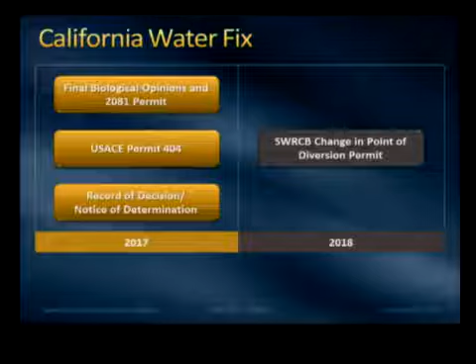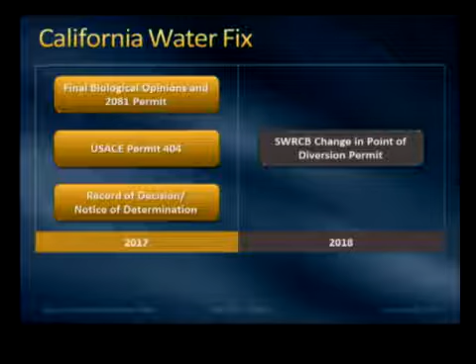And your team also mentioned in the presentation that the cost sharing agreements would follow. So are you thinking of bringing that to the board around April? Or maybe later? We've always wanted to bring the cost allocation at the same time that we have the permits, and it looks like it's on track to do that. So I think that's coming along, particularly on the State Water Project side. The federal side seems it's lagging just a little bit, but that's our plan, is to bring it in its entirety, because you've got to see the whole package. Any other questions of Randall?

Thank you, Randall. Next item is project implementation considerations for California WaterFix. John Bednarski. Yep. Welcome. Yeah, thank you, Mr. Chairman and members of the committee. I will be presenting really a kind of a two-part presentation, this is the first of two presentations, January and February, which will give a little bit deeper dive on some of the implementation aspects of the California WaterFix. So today I'll be covering initially an overview of the California WaterFix facilities, and then talking about our review of other mega tunnel projects that have been completed or in the latter stages of completion, comparators to the California WaterFix tunnels.

In February, we'll be covering risk management on the program, not only construction risk management, but also design risk management, and then also be reviewing the cost estimates that have been prepared for the California WaterFix. We've had 2 separate cost estimates prepared. They're within 7% of each other, but you'll get a deeper dive on that in February.

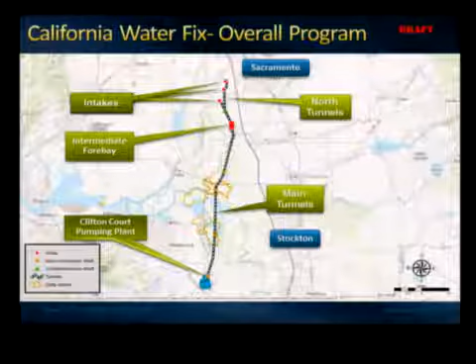So California WaterFix overall program stretches as the crow flies about 38 miles from the intakes on the Sacramento River down to Clifton Court. Along the way, we have 3 river intakes, each at 3,000 CFS. The water from those intakes is collected into what we refer to as the north tunnels. That water then flows to the intermediate forebay, where the water is commingled together. The hydraulic grade for the twin tunnels is set at that point, and the water flows then through the main tunnels down to the Clifton Court pumping plant, where the water is lifted into Clifton Court and then can be distributed to either the Jones or the Banks pumping plant south of Clifton Court.

On the tunneling portions of the program, the north tunnels comprise approximately 9 miles of tunnels. Fairly large tunnels up here because we have a completely gravity-fed system now with the revisions that we made during the EIR-EIS process. So those tunnels up there range from 28 feet in diameter to 40 feet in diameter.

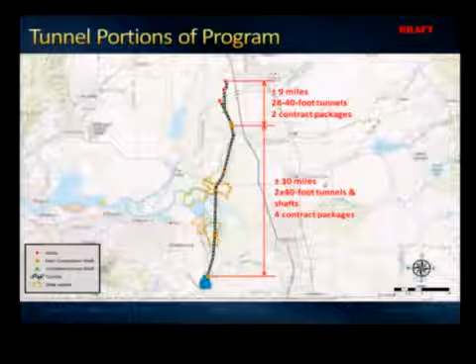They convey the water from the intakes to the intermediate forebay. At that point, the water is split into the twin tunnels, 40-foot inside diameter twin tunnels, which carry the water 30 miles to the south to the Clifton Court pumping facilities. Total of 69 miles of tunnel with this program. The main tunnels will focus on those.

They're going to be designed with a 100-year lifespan. Primarily what that means is that the tunnel segment design will be very robust, along with the gasketed liner. This will be our primary liner for the system. There will be no steel liner inside here, so we'll be relying entirely on the segmental liner design and the gaskets to prevent either infiltration into the tunnels or exfiltration leakage out of the tunnels during operation.

We've conducted a number of studies based on a revised hydraulic profile. We're very confident that these tunnels will operate very well with minimal leakage either in or out of the tunnels. The tunnels will be about 150 feet below grade, and the importance of that is that water pressure at the bottom of the tunnels will be about 65 psi, and because we're not in rock tunnels, we're in what is considered soft ground, fully saturated ground.

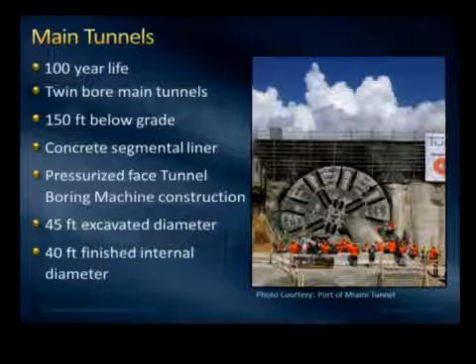Once you open up that ground with the tunnel boring machine, if you do not have what we call a pressurized face tunnel boring machine, that ground will tend to run into the machine in an uncontrolled manner. So the type of tunneling technology that we're looking at will be pressurized face; either an earth pressure balance machine or a slurry machine will be employed by the tunnel contractors. Excavated diameter is 45 feet. Tunnel segments are a little bit more than 2 feet thick. The inside diameter of the twin tunnels is 40 feet.

Many people ask us the question about, these are very large tunnels. How do they fit in with the state-of-the-art of tunneling technologies? We feel that we are situated squarely in the middle of large tunnel boring machines. We don't feel that we're at the bleeding edge of technologies. We're letting others set the pace there.

3 tunnels I want to point out that are the largest in the world. The Sparvo tunnel in Italy, a road transportation tunnel, was the largest until that was surpassed by the Seattle tunnel about 5 years ago with that design. Just want to point out at the time that design was about 30% larger than the Sparvo design. So this was a large increase in the size of the design. Many people have heard about the Seattle tunnel. I'll touch on that later in the presentation.

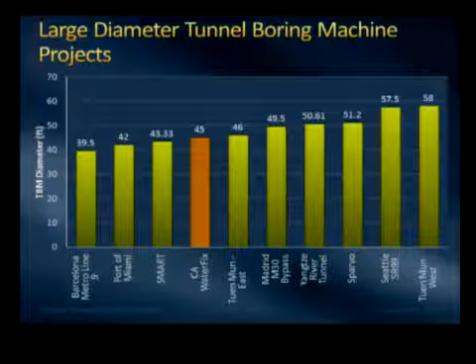But since that time, the Seattle tunnel has even been outstripped by a larger tunnel in Hong Kong, 58 feet in diameter. So as you can see, larger and larger tunnels are being built now. But again, we feel that we are comfortably in the middle of the large tunnel boring machine technology.

Some of the program facts: over 700,000 tunnel segments will be used. This translates to about 80,000 segmental rings that will be constructed in the program. 23 million cubic yards of material will be excavated from the tunnels. This has all been accounted for in the EIR-EIS. This material will be stockpiled near the tunneling sites on the islands as we move south through the delta. 10 to 12 tunnel boring machines will be in operation at some point simultaneously during the program.

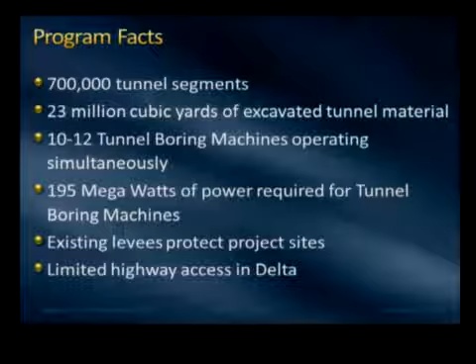And then to point out, almost 200 megawatts of power will need to be brought into each of the launching shafts for these machines. We do have large high voltage transmission lines that go through the delta, but these are to transport power up and down the state. So we are working very closely now with a number of different power providers in the delta to ensure that we can bring in the required amounts of power to run these machines. This is a long lead time item, so some of this work has already been started by DWR in advance.

Just to give you an overview of the river intakes, we have 3 of these at 3,000 CFS each, ranging in length, depending on the morphology of the river at the different locations, from 1,250 feet long to over 1,600 feet long.

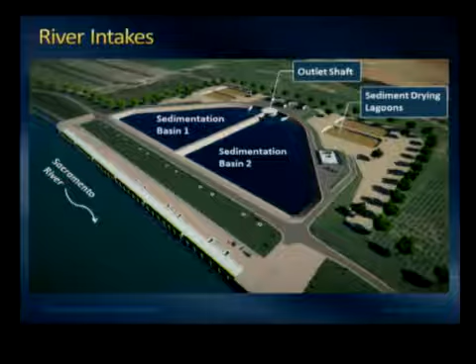At that point, you can see an outlet shaft. At that point, the water will drop into the tunnel system and then be carried south to Clifton Court from that location. At the terminus of the tunnels, we are planning to provide 2 large pumping stations, each one at the terminus of a tunnel. So we have 2 of those, 4,500 CFS each. Vertical turbine pumps will lift the water about 15 to 20 feet out of the bottom of the tunnels and deposit that into Clifton Court, where it will then flow by gravity to both the Jones and the Banks pumping facilities.

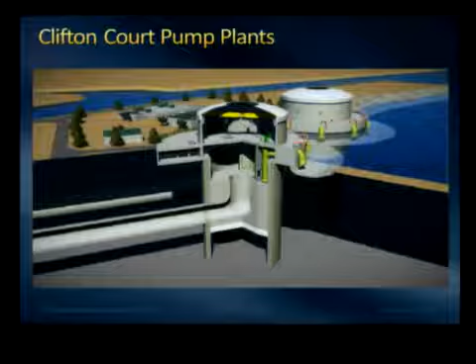Schedule for the program. Once the program is authorized to move forward, we're anticipating a 16-year implementation time frame. About 12 to 15 months early on, we'll be staffing that organization chart that I showed. That'll be hiring the in-house staff that will man a number of the key positions, as well as hiring the consultants that will be performing a number of the key work activities. There's about 4 years of land acquisition work that will take place early on in the program. We've learned from other projects that it's really important to make sure that you have all of your property acquired before you begin construction and start awarding construction contracts.

And then about 4 years after the commencement of the project, we'll actually begin work on awarding tunnel construction contracts. So tunneling will not start right away. I just want to make sure everybody understands that. And once the contracts are awarded, tunneling will still not start right away, because we anticipate that the contractors will be responsible for sinking those large shafts that will serve as the launching points for the tunneling activity.

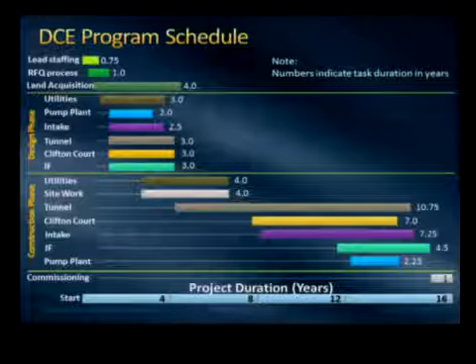So again, a 16-year overall implementation schedule. The construction of the tunnels goes for about 11 years. We're anticipating that 10 to 12 tunnel boring machines will be operating simultaneously during periods of that program, especially in those key years 7, 8, and 9. A lot of tunneling activity taking place.

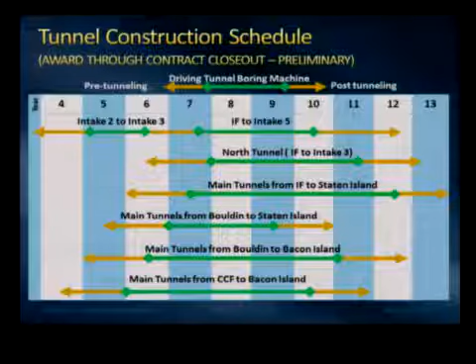Again, 10 to 12 machines working. It's a large number of tunnel boring machines to be operating simultaneously, but it's not unprecedented. In Mumbai, India, they have up to 17 TBMs working on their metro system simultaneously. In Doha, Qatar, 21 TBMs. And then closer to home in Mexico City, they have up to 8 TBMs working on a sewage collection system there too. So again, we feel strongly that the management of the tunneling activities is within the state of the industry practice these days.

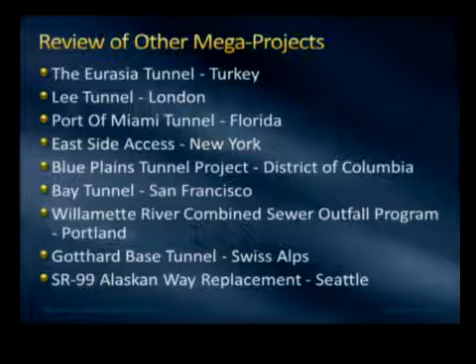So now what I'd like to do is shift gears and give you a review of some of the other mega tunneling projects in the world. We have a selected list. Many of these are what we call soft ground or mixed ground tunneling experiences that have been completed. We've got the Seattle Tunnel at the end of the list because we get so many questions about that project. We did want to definitely hit on that. And we have one hard rock ground. It's called the Gotthard Base Tunnel. You'll see why we bring this one into play for discussion also, but we did want to give a review of some of the larger tunnel projects that have taken place throughout the world.

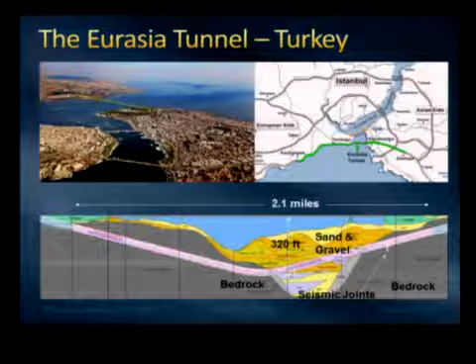So we'll start with the Eurasia Tunnel Project. This is a tunnel that crosses underneath the Bosphorus Strait, historically the divider between Europe and Asia. This project recently won the International Tunnel Association Project of the Year in 2015. It's a 45-foot OD. There's a typo in here. It's actually 40-foot inside diameter. So again, very similar to our size tunnel project. It was a design, build, operate, transfer project. So a unique delivery mechanism where the contractor designed it, built it, is operating the tunnel, and in the future will transfer that tunnel back to the owner. The project was completed ahead of schedule and within budget.

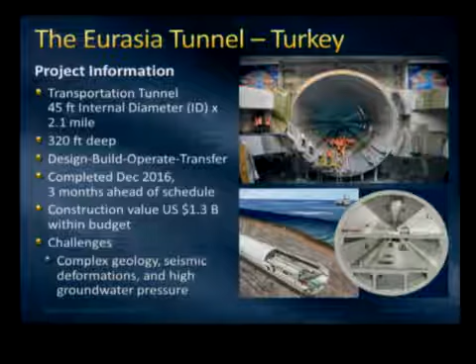Some of the key challenges were you're passing about 300 feet under the Bosphorus Strait, so water pressure at that point was about 165 psi. So quite a bit more than we have encountered with ours. They crossed an earthquake fault, so they had to install a seismic joint inside the tunnel. All of this was installed without a hitch. The tunnel went into operation last year.

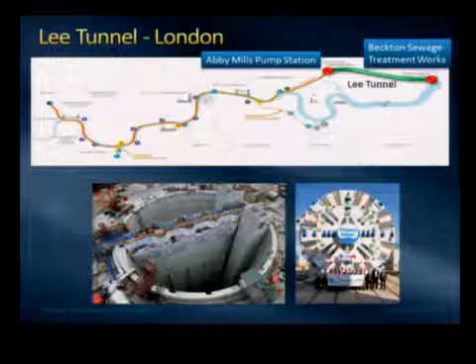The Lee Tunnel is part of a multi-tunnel effort, part of the Thames Tideway project in London. It is a CSO project, by that I mean a combined sewer outfall project, a series of tunnels linked together to capture surface runoff before it goes into the Thames River. The tunnels act as a collection and storage system, whereby as the rains subside, the water can be pumped out into a wastewater treatment plant and then deposited back into the Thames River as clean water. The project that has been recently completed there is the Lee Tunnel.

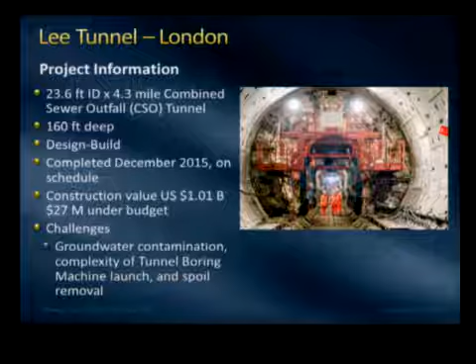A complex project, about 24 feet in diameter. This project was done with the design-build approach. It was completed in December 2015, on schedule and slightly under budget. Some of the complexities of this project are it was constructed in urban London, so you had issues with work site availability, contaminated soils that they dealt with, and also offloading the tunnel material that came out of the tunnels. They had offloading issues with that, but again, the project was completed successfully.

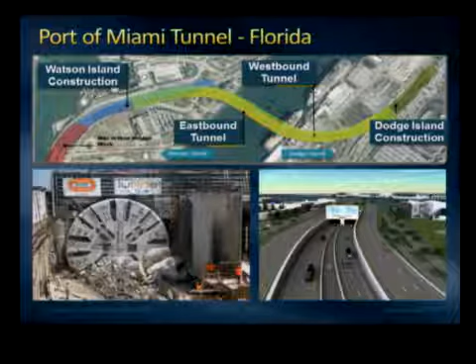Now we move on to the Port of Miami Tunnel, recently completed. This was another unique delivery method. They used what we call a P3, where the tunnel owner works out a relationship whereby the designer, builder, and concessionaire of the tunnel are the same entity. So this is a unique opportunity for design-build to be used in a procurement method also. The tunnel is very similar in size to the California WaterFix tunnels. A very deep tunnel, 120 feet, passing underneath the Port of Miami, a transportation tunnel. It was open to traffic in 2014 and came in on budget.

Some of the main challenges were the ground was very challenging. You were going through very soft limestone material as well as coral. There was a lot of grouting required on this project. There was a lot of investigation by the owner prior to issuing the contract documents as to how to best share the risk on this project, because they knew the ground would be very challenging. But the risk transfer and risk sharing worked out very successfully. The grouting operation was a complete success, and so was the tunneling operation.

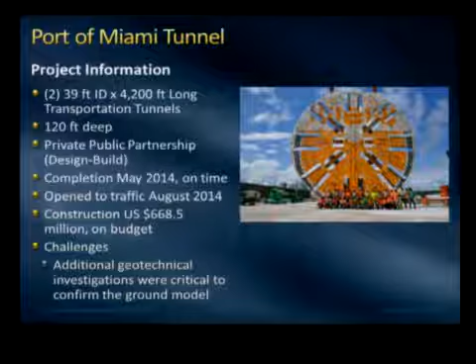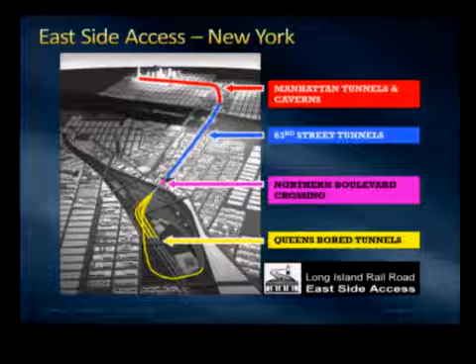East Side Access, this is a very large project, about $10 billion. It was conceived to enhance the connectivity of the Long Island Rail Road to Grand Central Terminal. The project that we're focusing on is the Queens Bored Tunnel at the bottom there. This is about an $800 million project. Very complicated project. This was done with a design-bid-build delivery approach, but the unique aspect of that is they had two potential bidders for this project.

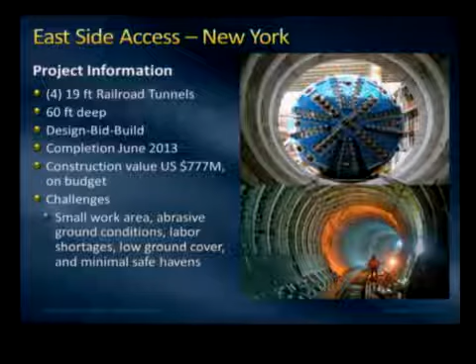Because the work was so challenging, they ended up negotiating the contract with the eventual winner, or the successful bidder, on this project. Very shallow ground cover. You were crossing underneath active railway lines, and you also had many cobbles and boulders in that ground, so there was a lot of ground freezing used here. Very tricky tunneling, but the tunneling project went through very smoothly and successfully.

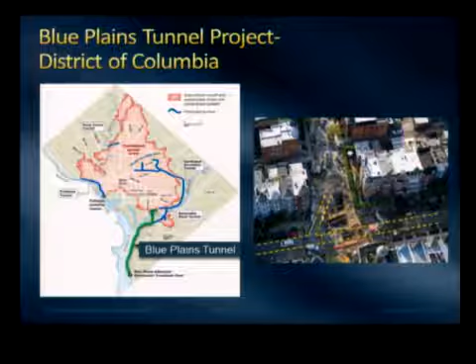Blue Plains project, this is part of DC Clean Water's overall CSO program once again. This is a 5-tunnel program. The Blue Plains project is one of those tunnels. It was completed successfully, along with the second tunnel, the Anacostia Tunnel. Some of you may be familiar with that. It's completed in Washington, D.C. Delivery approach was design build here, completed in 2015, ahead of schedule and under budget.

Some of the challenges here are a bit unique. This was the first time that this agency had used design build, so there was a lot of institutional resistance to that approach initially. Now they're implementing the rest of the tunneling project with the same approach. Program is going very, very smoothly.

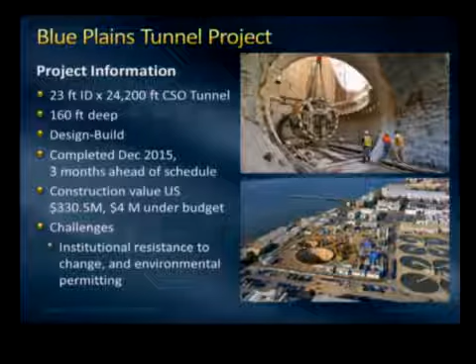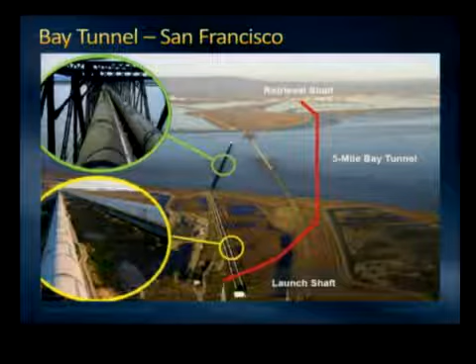Bay Tunnel. Some of you may be familiar with this. It's part of the San Francisco Public Utilities Commission Water System Improvement Program. It's a $5 billion program, basically to go throughout the entire SFPUC system, make upgrades to their system for seismic reliability and other reliability issues. This is the second largest project within that program. Calaveras Dam rebuild is the largest at about $800 million. But this was almost a $300 million tunneling project.

The reason it's very unique to us and applicable, 5-mile tunnel drive. Our tunnel drives that we're looking at are 8-mile, no intermediate shafts on this, similar to our project. First bored tunnel underneath the bay. Those of you that have been on the BART system, those are what we call immersed tube tunnels. So this was the first time that a tunnel had actually been bored underneath the bay. Very successful project. Again, there were some issues with contaminated ground, but the project finished on time and within budget.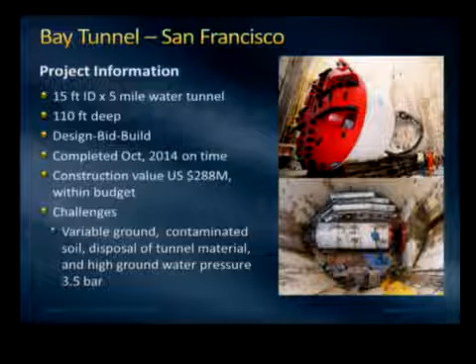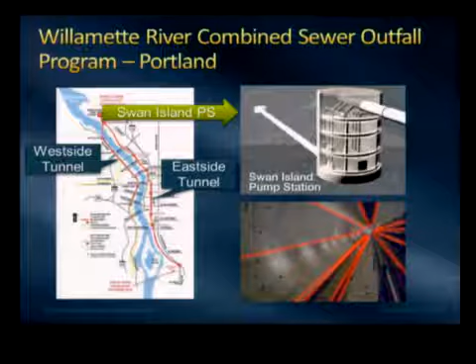Now we'll move on to the city of Portland. They also have a CSO project. Many cities in the U.S. have been having to comply with EPA requirements to clean up discharges into waterways, and the city of Portland is no different. Very large project here, 2 tunnel contracts, one on the east side and one on the west side of the Willamette River. This project was delivered in another unique delivery method.

Because of their prior challenging experiences with design bid build, when they committed to taking on these 2 large tunnel projects, they decided to go with what they call a cost reimbursable fixed fee procurement method. Under this approach, the contractor is hired early on with a fixed fee to work directly with the design engineers and the owner to plan out the project, and then they negotiate an actual reimbursement schedule for tunneling the actual tunnel works and building the shafts and the pump stations.

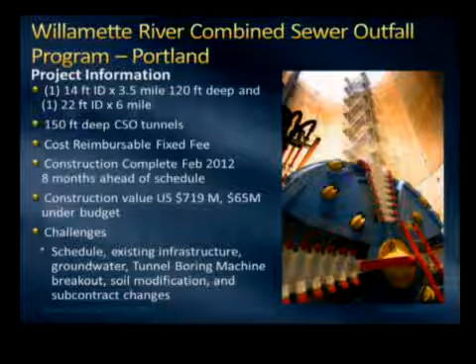Reasons for this, again, prior challenging experiences with design bid build, also very challenging ground, a lot of rocks and cobbles and boulders, and also the need to do a lot of soil modification deep down in the tunnel shaft. So the project was completed 8 months ahead of schedule and slightly under budget.

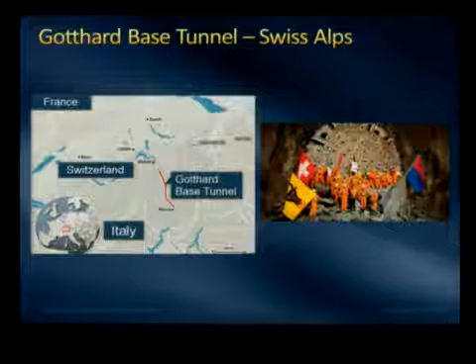Now we'll talk about the Gotthard Base Tunnel. This is the longest tunnel in the world. Twin tunnels, each one 35 miles long, about 6,500 feet underneath the Swiss Alps. Very, very massive project. I believe it's a $10 billion project. Hard rock tunnel, so it'd be different than the California WaterFix. But the reason we're referencing this one is, again, project size, $12.5 billion. It was over budget by about 7%. This was over a 17-year construction period.

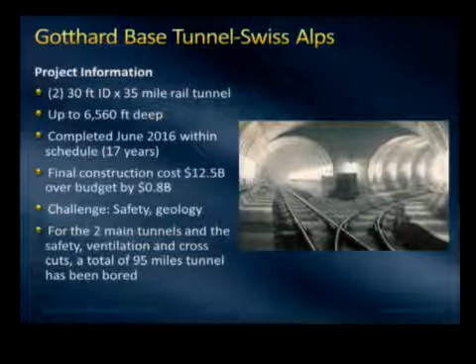So talking to the folks on this program, they feel it was very successful. Because of the rock conditions, the tunnel boring machines did get stuck several times because of squeezing ground conditions, and they had to work those out. We're not anticipating we're going to have squeezing ground conditions with our soft ground tunnels. That just doesn't happen with soft ground tunnels. So 95 miles of tunnel altogether, and again, 7% over budget. But the project is completed and was put into operation last year.

Finally, we'll touch on the Seattle project. It's called the SR-99 Alaskan Way Viaduct Replacement Project. At the time this project was conceived, it was the largest tunnel boring machine in the world. $2 billion program for the state of Washington to replace the elevated viaduct that goes along the waterfront in Seattle.

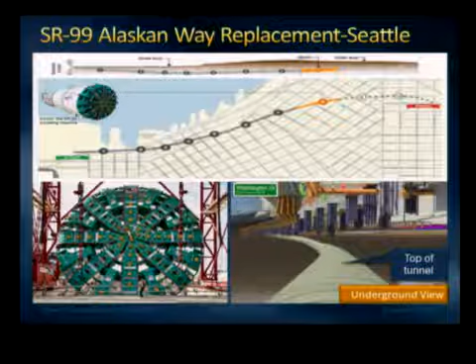53-foot inside diameter, 57 feet outside. Again, largest in the world. Project was procured with design build. They are currently experiencing about a 2-year delay. I'll touch on that in a few minutes. Project had, again, a $2 billion budget, but challenges are primarily with the tunnel boring equipment, some of the site supervision, and also the way that the project was set up and the project specifications. I'll touch on that now.

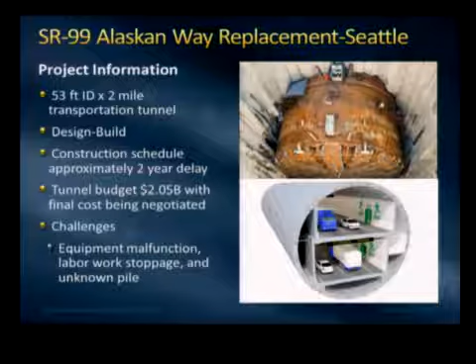Mining started in mid to late 2013. They got about 1,000 feet into the job, and basically the machine broke down. Took them a couple of years to figure out what was wrong, how to fix the machine. They eventually mined into a large access pit where they pulled off the cutter head. They replaced the main bearing, put everything back together. They are now mining, making excellent progress. We've met with their new project management team up there, very confident that they will finish mining this tunnel by the middle of this year and begin to finish out all the fit out of the tunnels.

So what were some of the reasons behind that? Those problems that they've run into, the best that we've been able to discern. Issues with the tunnel boring machine are probably first and foremost. As I mentioned early in the presentation, this machine, when it was designed, was about 30% larger than any other machine. The tunnel boring machine manufacturer had never made a machine this large. As evidenced by the amount of steel that was put into the machine when they repaired it and replaced the main bearings, about 100 tons of steel was added to the machine. So it would lead one to believe that the machine was under-designed when it started out.

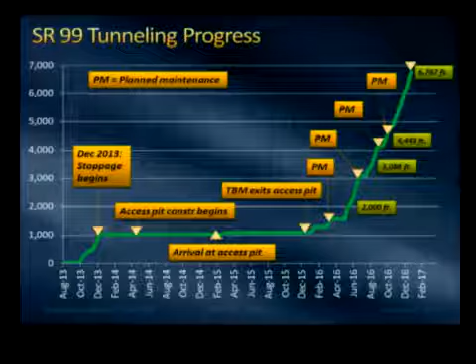So what are some of the lessons that we've learned from this project? I'll just kind of go through those because we have talked with a tremendous number of entities about this, and I think there are a lot of lessons learned that we can apply to the California WaterFix tunnels. I think first and foremost, the recommendation is to have a proactive risk identification and management program. When I showed the org chart, you can see that we positioned risk management, very high position in the org chart, reporting directly to the program director.

Good geotechnical information is key. There is no way for an owner to get out of responsibility for the condition of the ground. So we have to do a very good geotechnical investigation for this program. That has not started yet. That will be some of our early activities. Select a project delivery method that is appropriate for the type of work to be done. I've discussed a number of different methods that have been implemented on a lot of successful tunnel projects. We still need to ascertain what might be the best approach for the California WaterFix.

Build a strong owner's team. It's imperative that you have a knowledgeable owner that's running the program, a knowledgeable owner that's embedded throughout the project team that's guiding the work of consultants. Our organizational chart has been developed to create that exact result. And then finally, resolve right-of-way issues early on. We have planned out a very aggressive right-of-way acquisition program that will be implemented in the very early stages of staffing the office.

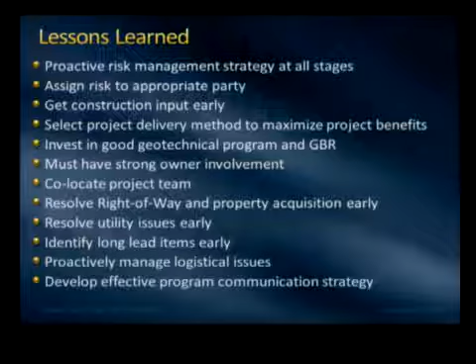We anticipate to have all of the access to the key project sites acquired before we begin any construction work. So with that, again, the next steps will be to present to this committee in February on the design and construction risk management process, as well as the cost estimates that have been generated for the program. And with that, I'd like to wrap up my presentation. If there's any questions, I'd be happy to answer those.

Yes, any questions? Yes. Director McKinney? Thank you, Chair. This is a great presentation, and I really appreciate the fact that we had some examples of projects that had some hiccups that we could take lessons from. I'm curious, did we not find any projects that just failed completely?

Personally, I am not aware of any that have just been stopped. And there was talk in Seattle about just stopping the project 1,000 feet into the ground. They had the resolute desire to move forward, and it did. But I'm personally not aware of that. I know that we had our own issues with the Arrowhead tunnels. We worked through those issues and completed those. So I couldn't suggest any.

No, I'm in the same boat. I mean, even like the Big Dig in Boston, eventually, you've got so much money and time and energy, you just go in and finish it and gut it out, even at several times over cost overrun. I'm aware of one where this board actually contemplated backing off and just going around their Arrowhead Tunnel project, but it was just too hard. So eventually we went back in and finished the job, and that's usually what happens. Okay, thank you. Director Murray?

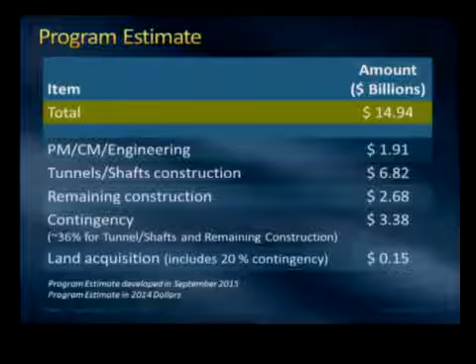Yes, let me introduce Jacob Katz. We're very fortunate that he has made the trip down to our committee meeting today. Several of the directors, when you've been touring in Northern California, may have had an opportunity to go out in the Yolo bypass. Some of you may have heard the presentation by Jacob. He's really the brains behind the Nigiri project and the other efforts going on that show fish and farms compatibility, and has done a lot of really good work in the bypass and elsewhere. So Jacob's with Cal Trout, an environmental organization that likes to get things done on the ground and has really done some cutting edge work.

So Jacob, if you've heard Jacob talk, he knows a lot, and he can talk for a long time because he knows so much. Now, Bernarski does too, and so we're pushing the clock just a little bit here. But Jacob, again, thank you much for coming. A great pleasure to be here. Thank you, Katz. Roger.

I've already been told by Chairman Peterson that I'm on a short tether here, so I'll do my best to... The word was stick to the game plan.

But what I'd like to do is actually take a step back. Often in meetings such as this, we're required to do that 30,000-foot overlook. In understanding the function of the Central Valley, how the ecosystem actually works, and therefore managing it effectively, it's really helpful to get in on the ground, come in lower. And the amazing presentation we just saw, one about improving and updating infrastructure to assure reliability, is essentially the exact same presentation I'm giving here.

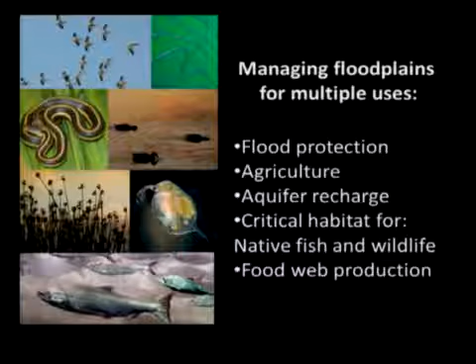This function, the form of water spreading out and slowing down across the landscape, is the absolute critical key of everything I'm going to talk about today. It's what facilitates groundwater recharge, but it's also what facilitates the incredible productivity of the floodplain that leads to ecosystem abundance. And that's what we're going to get into.

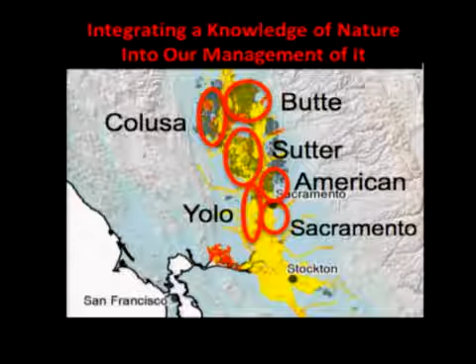So we can design these water solutions that work for fish, for wildlife, and for people if we understand the natural processes that once governed the Central Valley and water flowing across California's landscape, right? So we're integrating this knowledge of nature, a 21st century ecological understanding of natural process, into a water infrastructure largely built 100 to 150 years ago when little of that was understood, right? And so in order to do that, we have to understand the very system that we're talking about.

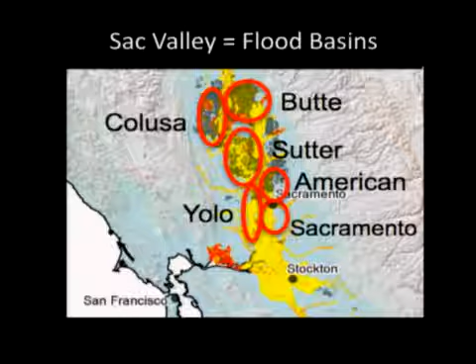For now, let's focus on the Sacramento Valley, right? These counties you've heard, Butte, Sutter, Colusa, Yolo. Those names come from the flood basins, from the low-lying ephemeral lakes that would happen every year as the Sacramento River and its tributaries came out of their banks during rain and snow events and flowed out onto the Central Valley, creating a mosaic of different wetlands that was roughly 4 million acres in extent.

That was not any specific kind of wetland, right? Wetland is just ground that is saturated, that is there for a long period of time. We're talking about willows, we're talking about ephemeral lakes, we're talking about emergent vegetation, a whole different suite of different wetland habitats, right? And all of that fed by this simple process of water spilling over natural levees and out onto the floodplain.

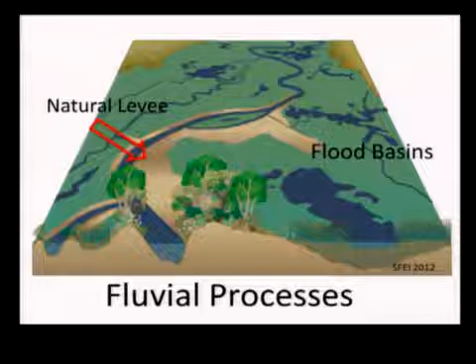Why am I focusing on this? Because if you don't understand the way that water actually flows across the landscape, you can't manage it effectively. You can't optimize the way in which we actually meet our environmental needs and the needs of people. So the key piece here, and I'm going to illustrate this with a LiDAR map.

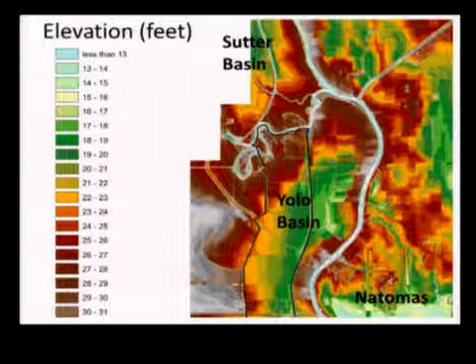What we're getting at is that the Natomas and Sacramento basins, low ground. The Yolo Basin itself, low ground. Sutter, low ground. And that was taken advantage of when the water infrastructure was designed. So the Yolo Basin and the Sutter Basin were taken as these pressure relief valves where we wouldn't develop, we would farm, but we would pass the floodwaters through those areas, right?

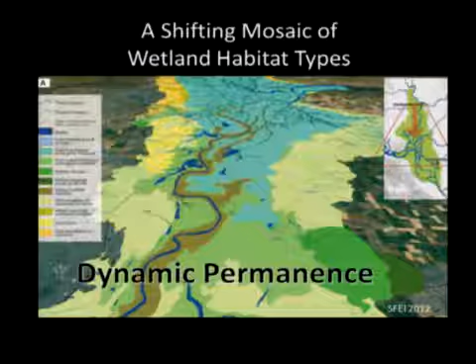So there was this idea of every water year wasn't the same, right? In some years you would have an inland sea. The first storm, of course, 1862, right? When it rained literally for 40 days and 40 nights from Christmas of '61 through January of '62, right? You had 3 feet of fresh water on San Francisco Bay itself. They were catching freshwater fish on Fisherman's Wharf, right?

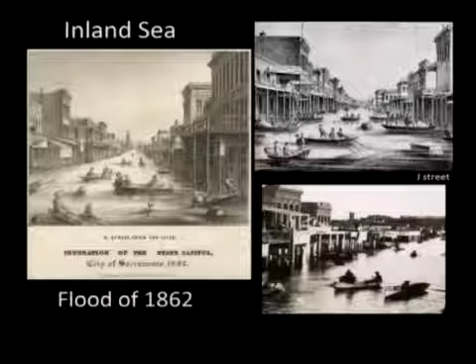Leland Stanford, when he went into his inauguration in '62, took a rowboat here down J Street to the Capitol, which you'll remember is built on a hill, right? On a levee, in fact, on a natural levee. So this idea of an inland sea, of course, in big water years like this one, we would have had large, but it was not every year. What you had was a shifting mosaic. In dry years, you still had a whole bunch of wetland, but it would have been of different kinds, right? Of course, that all changed.

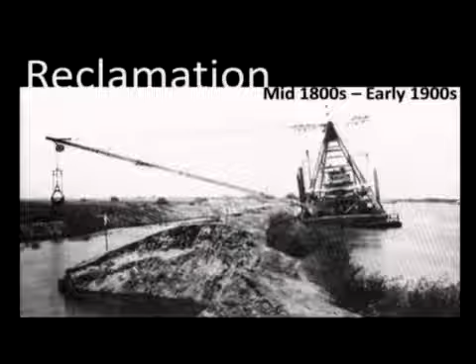Within 100 years, starting in the mid-1800s through the early 1900s into the 20th century, reclamation was the name of the game, right? A very simple concept, drainage, right? 13,000 miles of levees were done. The impact of this is hard to overestimate, right? A system, and if you think of the valley as a bathtub, right? It had a fairly narrow outlet right there past Rio Vista going into Suisun Marsh.

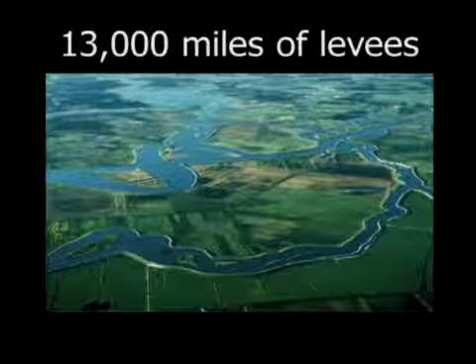Huge rains. We all now know what a Pineapple Express is, what a rain on snow event is. The valley can get an immense amount of water, and when it does, the bathtub fills up. Those wetlands inundate for various long amounts of time, but the key is for quite long periods. And what did we do? We drained it, right? Every single acre of farmland is designed just like a Safeway parking lot to drain that water off as quickly as possible.

Right? That is the hydrological antithesis of the natural function of the ecosystem. Right? We understand now, again, from groundwater recharge, the incredible wealth we were squandering by sending that water out to sea. Right? But it also was the basis for how the native critters interacted with California's landscape. When you fundamentally change that, hence, when water no longer flows out to sea but flows up towards pumps, you confuse some critters, right?

83%, well over 3/4 of the fish in the state are headed towards extinction. Right? What's remarkable is not that we have endangered species, that Delta smelt or winter run salmon or green sturgeon dominate the headlines. What's remarkable is that we've lost so few, because it's not just in the Delta or the Klamath or the Russian River or the water withdrawals in the spring systems down in Death Valley. Everywhere across California, we are the hydraulic society. We have fundamentally changed the way that water flows across the landscape. We've done it without considering the environment, and this is the legacy of that.

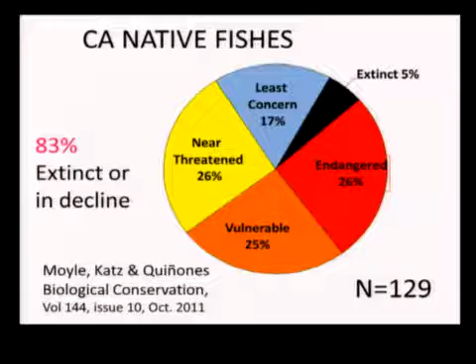Now, when I look at that, you can take a standard doom and gloom view, but I look and I say, well, we actually haven't been creating our solutions. We haven't been imagining our solutions at the actual scale of the problem. We've been addressing symptoms and not root causes. And so if we can fundamentally start to understand what's actually driving extinction and decline, then we can start to reverse it. And maybe a great way to look at that is just start in the Central Valley and look at Chinook salmon. There were 4 runs of Chinook salmon, right? 3 of them are now endangered. The one that is not is almost entirely maintained by a hatchery system, which has many faults of its own.

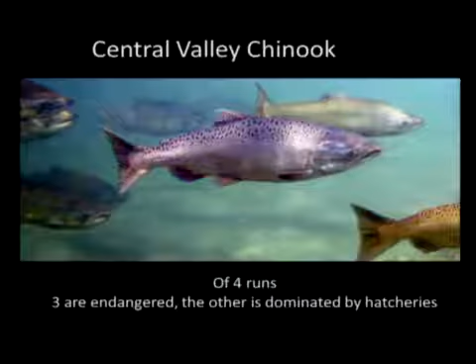What I want to do is look at how the system worked prior to altering it, so we can start to understand what we can do within this intensely managed landscape to mimic those natural processes, to allow native fish and wildlife to recognize the system that they evolved in and to flourish. Is that possible? Yes, I believe it is. So the Cosumnes River, many of you may not be familiar with it. It's so small it didn't even get a dam.

But what that means is that when it rains on the Cosumnes, the water comes up. And when the water comes up, there are several places, old tomato fields where a levee failed and the farmer didn't bother to fix it, that function very similarly to a pristine floodplain, meaning that the water spills out over a levee and sits out on the land, right? And about 20 years ago, Dr. Moyle at UC Davis and others, his student Carson Jeffres, my colleague in all this work, did a small experiment.

They said, well, you know, most people think that that's a swamp, right? And we know that fish belong in the river, right? A river belongs in its banks and the fish belong in the river. What's happening out there on the floodplain?

Yeah, maybe that's important for ducks, but surely, you know, salmon don't belong out there. And Peter and Carson said, well, let's find out. Let's look. And they did a very simple experiment, placing caged fish on one side in the river channel and on the other side in this inundated floodplain, like you can see there on the right.

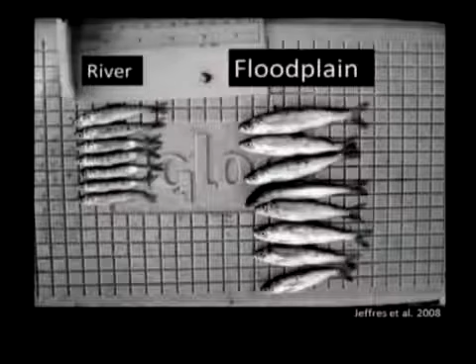And the results of that are now familiar to all. This picture shows the floodplain fish on the right and the ones in the river on the left. The river fish barely grew at all. Those on the floodplain were growing at immense rates. What I now know and what I can tell you is this is the first glimpse in the modern era of what a Sacramento salmon should look like.

There's real truth in some of our adages and phrases. You don't want to be the smallest fish in a big pond. This guy has a lot of gas in the tank, right? This guy not so much. This one can outswim a striper. Not so much. This size of fish has a much better chance of returning.

And that's not backed up just from data in California. If you look to every kind of seagoing trout and salmon worldwide, you will see evidence that suggests that size at ocean entry, when a juvenile salmon or trout is hitting the ocean, is the best indicator of when, if that fish returns. So this was groundbreaking, but it was the first glimpse. And it was an important glimpse, right?

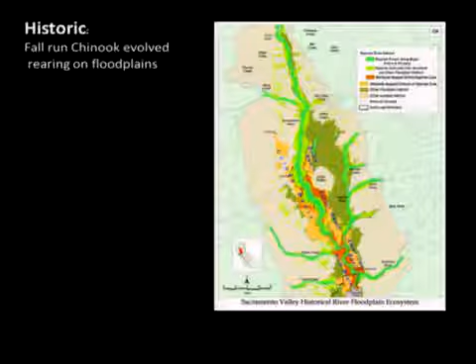We had a little postage stamp, 15 acres of functioning floodplain, right? There used to be 4 million acres. We're looking at a map here of the Sacramento Valley. This would be the Sutter Buttes right in the middle, the city of Sacramento down here. And again, all those different colors are just to show the different kinds of wetland habitats, right? And this would have been pre-development. Today, 95% of those are gone, right?

So we had 15 acres of pristine habitat. It looks like fish do really well there. One reaction to that can be, so what? I mean, I was just talking about trying to scale the solution at the same scale of the problem. Landscape scales, trying to bring back abundance. That's going to fundamentally need to be tens of thousands, hundreds of thousands of acres. A little expensive restoration project here and there isn't going to do it. $400 million in public funds to bring on 125 acres just fundamentally isn't actually a solution at all.

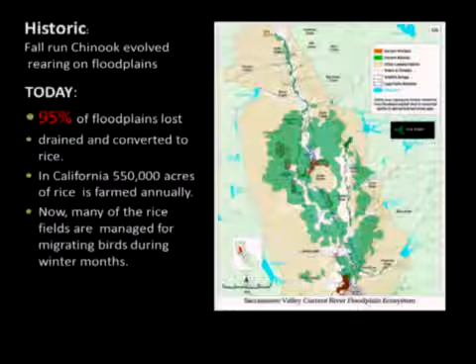And we had a question, understanding that we're never going back, understanding that that lucrative ground is never again going to be, at least at the scale that we need it to be, tens of thousands to hundreds of thousands of acres of waving fields of tule. But can we, within this managed system, mimic those natural patterns? On a rice field that still grows food for people in summer, in winter, can we make the food? Can we mimic the natural flood patterns, spreading water out and slowing it down, that allow incredible food and habitat to be produced?

And after 5 years of doing this in Yolo Bypass on Knaggs Ranch, I can tell you unequivocally, yes, absolutely. Now, I can't get into the details, which is, I'm a science geek. I'd love to talk to you about all the details of 5 different years of experiments. But basically, we said, hey, if you're a rice grower, what can you do to make it better for fish? And we looked at depth. We looked at how you cut your rice stubble after harvest. We looked at substrates, a whole bunch of different farm practices.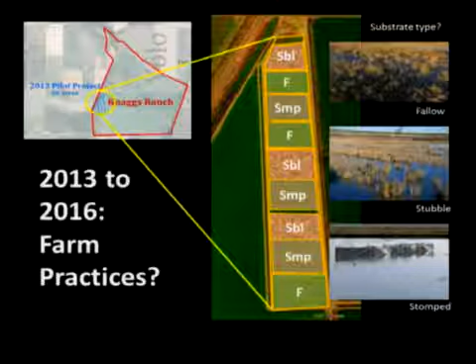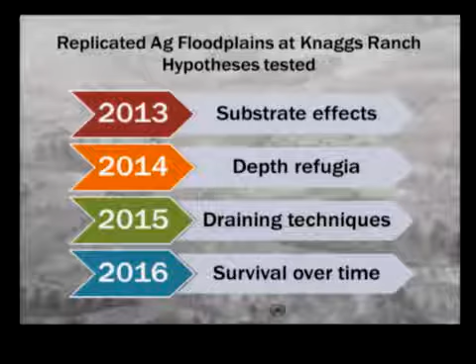And after 5 years, I can tell you, after looking at all these different things, if you can get that water spread out, if you can slow it down, you make an incredible amount of bugs. Those bugs make fish. They're very happy. They're very big. They look like this.

This top fish was put in on the first year of our experiments in 2013, the end of January. It doubled its weight every week, looking like this after 6 weeks. And then when captured, leaving Yolo Bypass, entering the Delta, it looked like that. So that's not just a fat fish. We call them affectionately floodplain fatties.

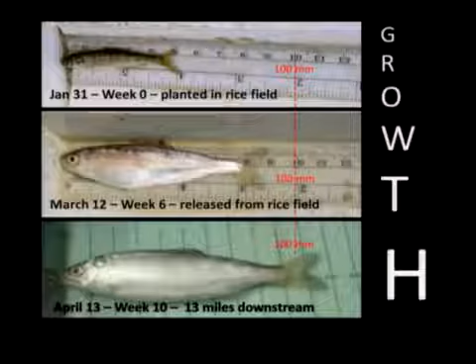What we're actually talking about is the capacity of the Central Valley to actually produce biomass. You're talking about the driver of natural productivity that we have, in essence, surgically removed by straight-jacketing our river channels. Now, what do I mean? First, let's just look at some fat fish from each year. Again, these are some of the fastest growth rates ever recorded in California.

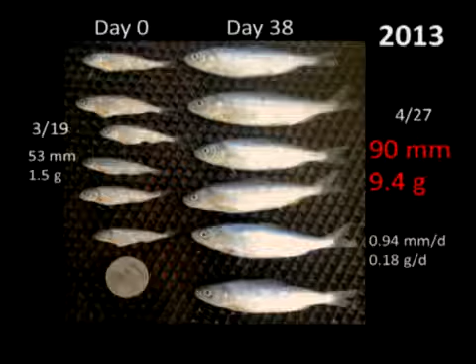It's not simply that it's something abnormal happening at Knaggs Ranch or on the roughly dozen other floodplains from the San Joaquin well up into the Sacramento Valley where we've done these experiments. This is what a Sacramento or Central Valley salmon should look like. In essence, we are starving our salmon populations and the rest of our fish populations currently, again, as a direct result of a water infrastructure put in place well over a century ago. And they look like this now.

Similar results. Maybe this is the best way to just give you a glimpse into some of the experiments we do without getting into the details too much. Last year, I did what I call an aquatic transect. So at the Sacramento River, just north of the city of Sacramento, at Knaggs Ranch, this is the Sacramento itself. This was the first time in the 5-year study history that we actually had flooding and it was coming into Yolo Bypass. So we took some small floating cages, put 10 fish into each one of those cages.

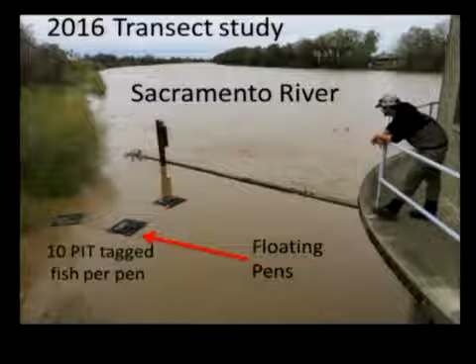The tagging technology is such now that a tag the size of a grain of rice, I can inject that into the body cavity of a fish and I can follow each one of those fish. I know their names. I can track, that's Harry, that's Sally, this is Jack, and you grew this much under this period. That means that the statistical validity of what we've been putting out here has not been matched prior. So here's fish growing in the Sacramento River.

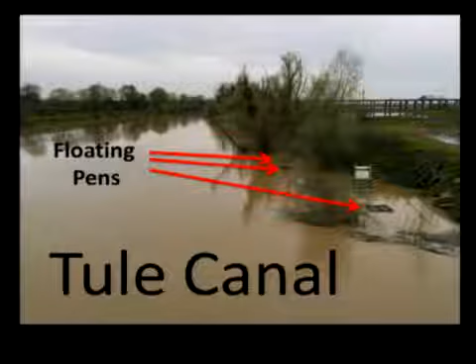Here's the Tule Canal just on the other side of the levee. Again, the levee is just there to the left of this picture, right? So you're talking about 30 yards on the other side. The canal system is how water tends to move across the floodplain as we manage it today. And then we have what I call managed agricultural floodplains. Rice fields that were reflooding in winter to mimic the way that water would have slowed down and spread out on a natural floodplain. Those fields also get the same exact treatment of cages and fish.

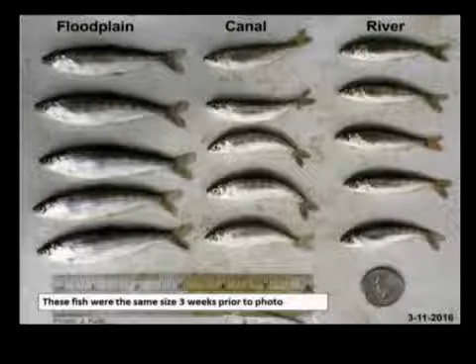And what do we get? Well, we had a flood. We only could do this for 3 weeks last year, but this is the results, right? Again, more fat fish. Those in the river barely grew. Those in the canal grew, they're starting to get a little belly, a little pooch, but the floodplain fish are dramatically larger. And this was the first year that we really can pin down why.

We have designed an entire system that deprives these animals from their food source. I can explain why that food source is so much larger now. I will in a minute. But this is ludicrous, right? I shouldn't be here telling you that fish need to eat.

But I am. If you leave with just a single idea: fish need to eat, right? Our levees are starving them. How do we fix that? We can put those solutions together really quick. They're quite economical, right? We've already been working with Roger's team in the Sacramento Valley to start to put these water infrastructure upgrades into effect that take into consideration the life history of fish.

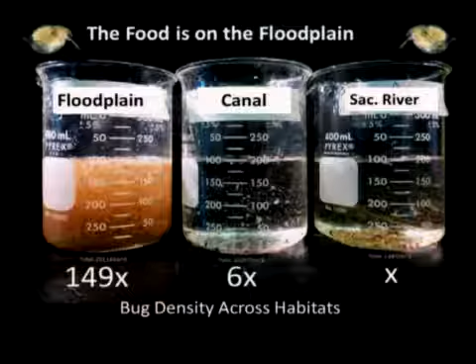But for very little investment, we can actually expect revolutionary outcomes. And it's very rare that you actually get a chance to do that. So here's just throwing that onto a slide, right? After only 3 weeks, the red line on top is the floodplain growth, the canal growth, and the river. 700% greater growth in just 3 weeks. That expands each week. In years past, we've seen as much as an order of magnitude greater in as little as a month. So really substantial.

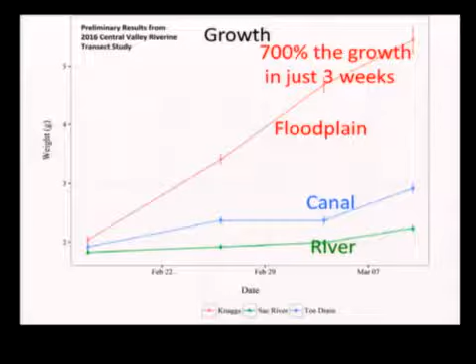And this is what it comes down to, that it's really as much about physics as it is biology, right? The solar panel of the floodplain is what powered the aquatic food web. What do I mean? Well, what's food for people? It's just when sunlight gets turned into sugar by an agricultural crop, right? And we've been measuring productivity of the Sacramento Valley's floodplain in 100-pound bags of rice for well over a century now. What we're saying is you can still do that.

You can still have your productivity in summer, but in winter, we can now start measuring those environmental benefits. Those include water recharge, which is easy to put dollars on, but they also include fundamentally changing the productive capacity of the valley to produce fish. And actually, in the ultimate economic analysis, that may be the biggest change. It's a difficult one, it's indirect costs, but we all understand that dysfunction within our environmental management is one of the greatest challenges to water security. And more fish ultimately equals greater water security, and that's exactly what we're talking about here.

So mimicking hydrologic processes, right? Understanding how water used to flow across the landscape and mimicking that in a very intensely managed system. We're not talking about restoring pristine habitats. We're talking about restoring ecological function. We're talking about actually starting to address the drivers of the system instead of the symptoms, right?

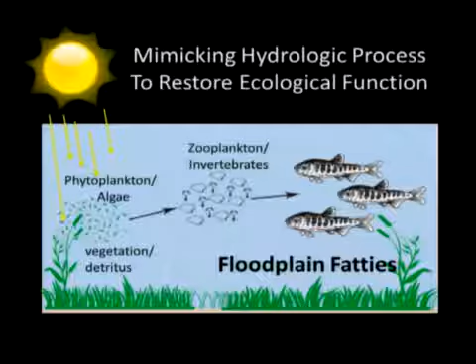Because this is true not just of the Sacramento Valley, but every large river valley in the developed world. It's the Seine, it's the Thames, it's the Danube, right? We have straitjacketed our systems. We are experiencing the same kind of environmental degradation and collapse in those places, and it has the same environmental economic consequences. A very simple way of looking at that.

We're running out of power. Your car doesn't work when you don't put gas in it. My kids' toys don't work when I pull the batteries out, right? I need to eat. All of that has to do with the exact same thing that we're talking about now. We need to put the batteries back in the system. What does that mean? It means reconnecting our floodplains to our river in specifically designed places where we can, on an annual basis, do so. Yolo has been the target, but there are many other places where we can do that and many different methods in which we can achieve it.

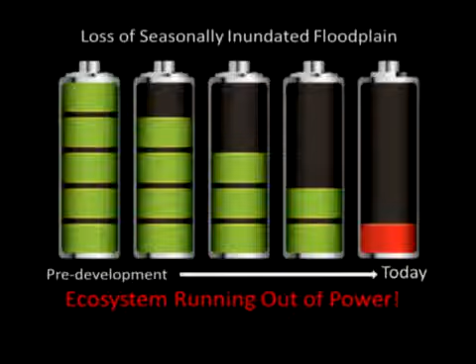Remember the take-home? Well, here's the picture that should be ingrained. When you go to sleep tonight, this should be on the back of your eyelids. Now, this is not a cherry-picked fish from the river and a cherry-picked one from the floodplain. We actually had to go in the river because we were tagging this fish. This was the biggest fish we could find coming out of the Feather River.

All right? Now, I think most people think, because there aren't fish coming back, that the Central Valley doesn't produce small fish. And that's just blatantly not true. A look at the data, say, from 1998 will show that roughly 100 million small fish were produced in the Sacramento Valley alone, right? Those fish are about the size of your thumbnail. They don't have anything to eat. They can't find anything to eat.

And unless there's large winter storms that flush them, literally flush them out of a hostile system, out to the California current, into the Farallons, where the wind's blowing and the upwelling's going and the eating's good, we don't see these guys again, right? But if you just allow them to make it into some kind of habitat which approximates the way the valley used to look like, within a matter of weeks they look like this. And you're changing the outcome of the fish life histories within the system.

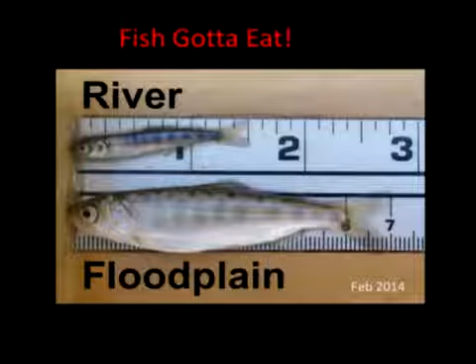So, excuse me, wrong thing.

And that is so absolutely fundamental to the way that we need to manage this system that I felt we needed to do it. And maybe the easiest way to turn that into analogy is a bathtub, right? So if you're just thinking about flow and not talking about holding that water back out there, well, you can always fill a bathtub with a fire hose, right? As long as more water is going in than's coming out. It's costly as far as the amount of water used, but it'll fill that bathtub up.

Now I'm thinking about Yolo Bypass, a 60,000 acre bathtub, right? It takes a lot of water to fill it up. If we allow it to continue to be drained the way it is now, specifically designed to pass that water as efficiently as possible, you can fill it up and 5 days later, it's no longer inundated. You're not getting the benefit you need for those fish. If you use the plug, you get so much more benefit for so little investment.